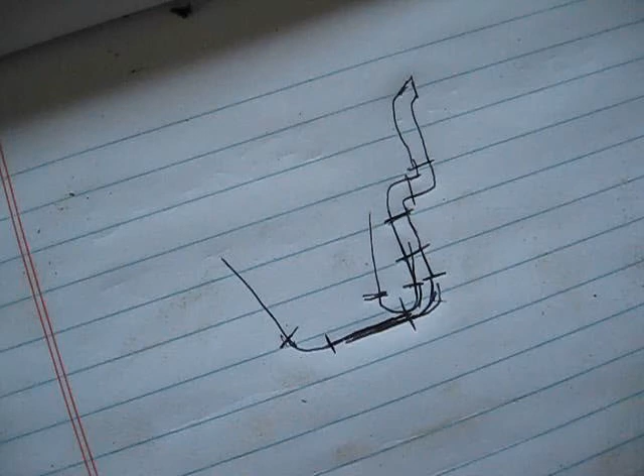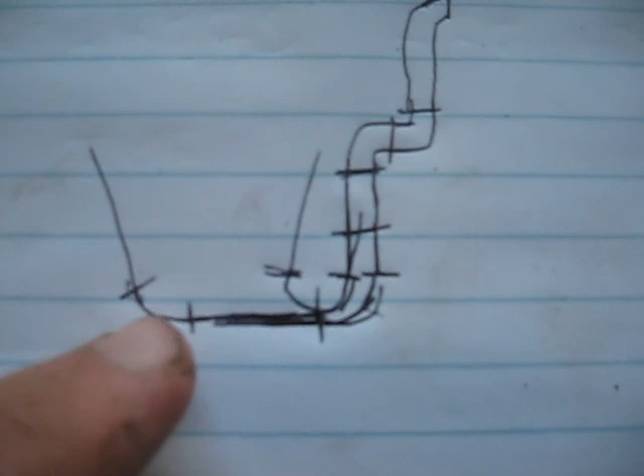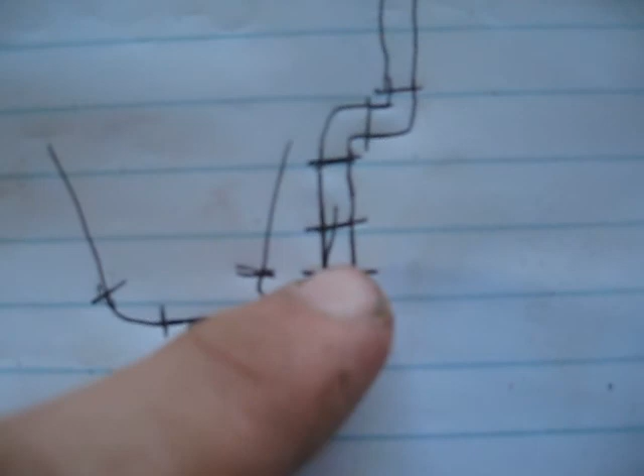Basically the plan for the exhaust is to have a bend come off the left side and a bend come off the right side. The right side bend will be a little sharper than a U because of how it's angled, so there'll be a bend coming from the left that matches it. Then a little ways after the bend, or right after it, it will be joined into a single pipe.

And that pipe will run over to the front of the running board, over, and then out my stainless steel side pipe.

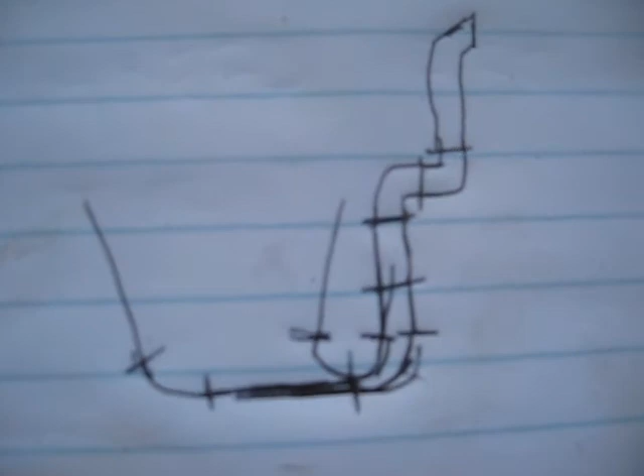So that is the basic plan for the Craftsman. Sorry it's a little blurry because I was in macro, but I have most of the pieces, I think, that are needed to do this.

I have the other piece of a futon frame that I can use for it, and that is what I am planning on using it for. So I have the sketch here, and now I just need to get cutting pipe.

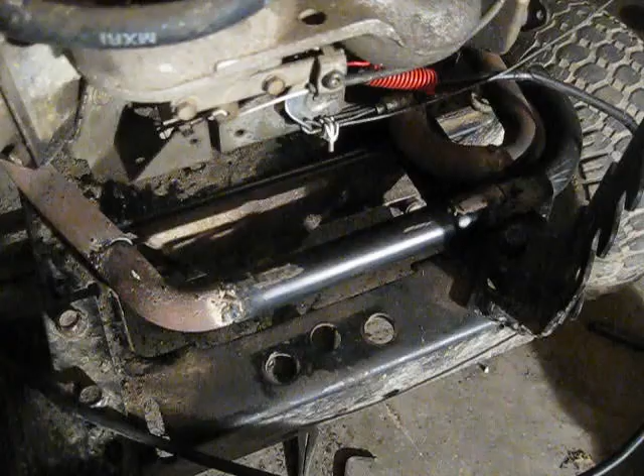So it's about 8:45 right now, and I have the manifolds pretty much done. I cut this one, and the other one obviously, and I have everything tacked in place, and it's looking pretty good—especially since I figured out how to get my welder to weld on a lower setting so that I can weld this stuff.

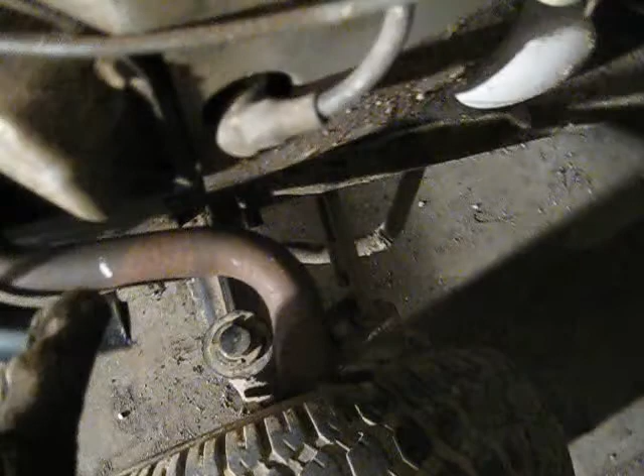It's coming together. So I have a mark to cut that so I can keep this manifold, but right after that spot I believe I'll be going to the bigger stuff like this. It'll come out and angle down, and I'll cut it out so that I have an elbow off that piece like that.

I'll have the elbow angled down, and then I'll have it come around, and I will have my side pipe mounted about halfway sticking out from this side piece, or maybe I might have it under all the way—I'm not sure yet. But I still have a long way to go.

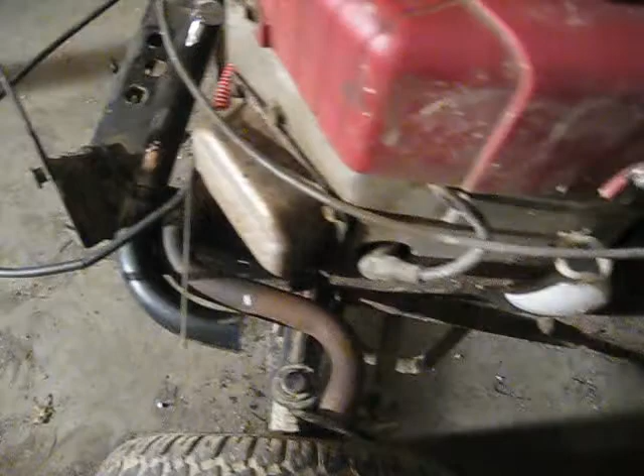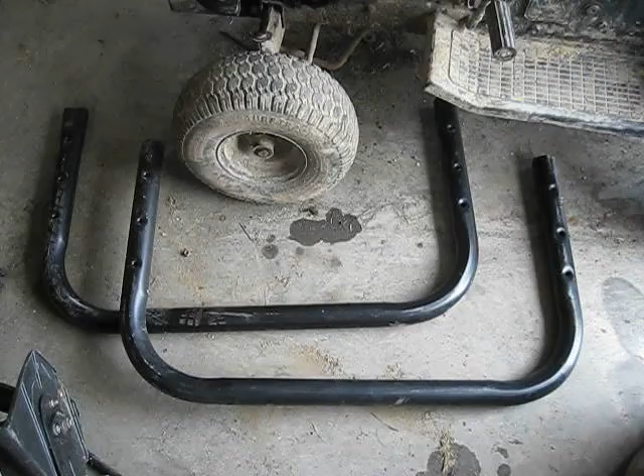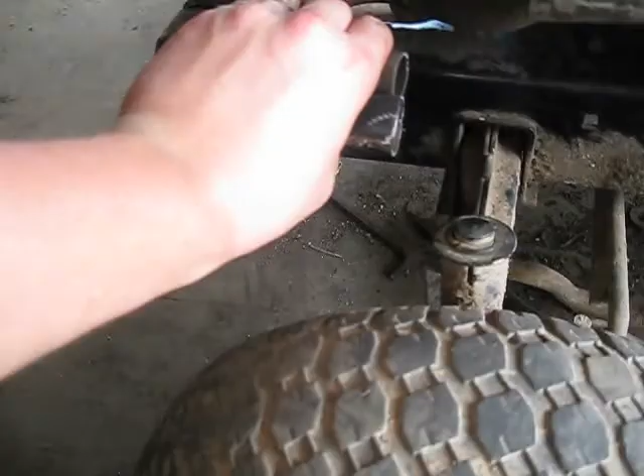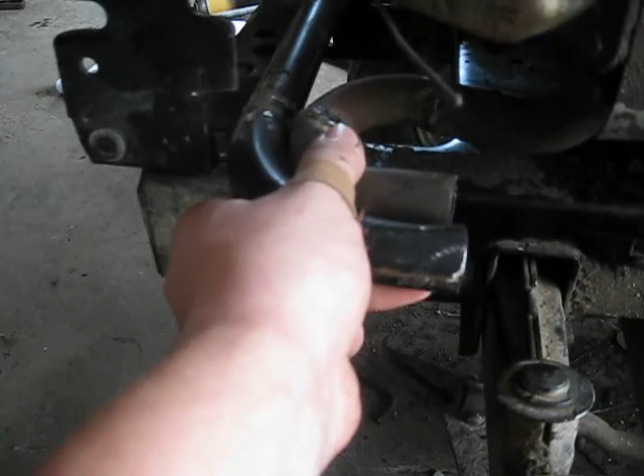Okay, so the game plan for today is to use these pieces of pipe here to finish up the exhaust. As you saw in my last clip, I got the exhaust on and it's all mounted up here. I have the hood bracket right here, and it's notched out so the pipe can get on there and it's tight, but it fits on there, so my hood should be good.

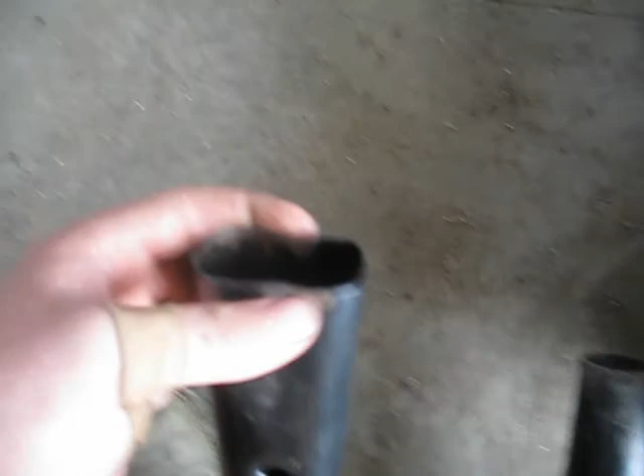To get this done, I have this idea to crimp the pipe kind of like this. This is just a test, but to crimp it—it's about the size of two pieces of pipe, about 1 by 1. So the pieces of pipe off of the angle right there should slide into something like that very easily.

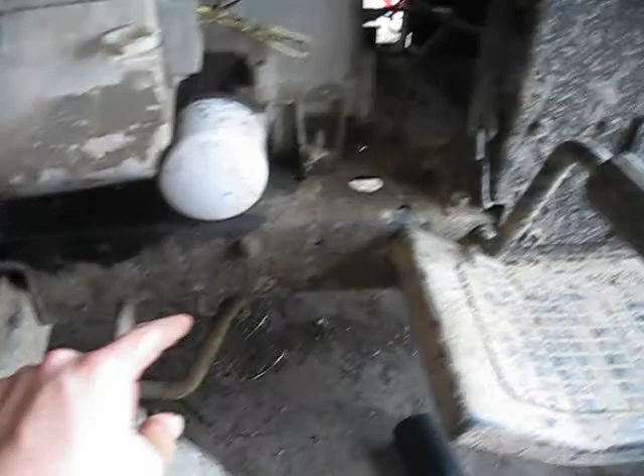Then what will happen is the pipe will angle down slightly to go underneath the running board here, and I might have it angled out so it comes this way, to have the pipe come out around right here. It'll be angle cut and should be good.

I'll probably secure it right to the back of the running board here, but there's a hole right where my finger's at—there it is. So, time to get started.

Well, I just barely got into mocking up the exhaust, and I already ran into a problem. As you can see, I have the tire cranked all the way, and if I hold the pipe up here in the orientation that I want it, which is right like that, that rubs the tire.

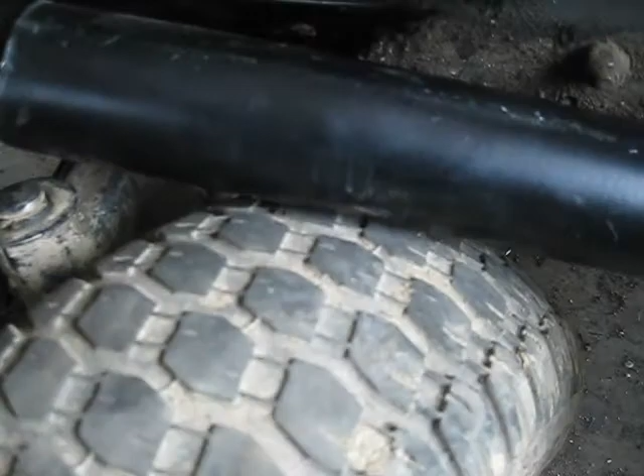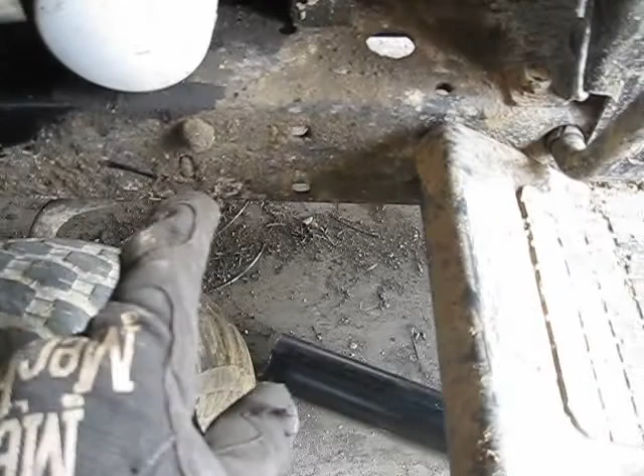So what's going to happen is I will have to have a straight pipe come off of this, and we'll have to angle it down somehow in this 4 inches or so that I have right here. So I'm going to start cutting pipe and see what I can come up with.

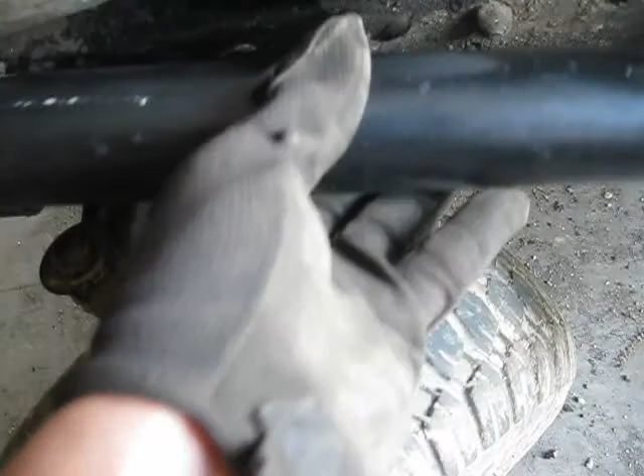Okay, so I have my piece of pipe right here, and it looks like if I have it angled like this, as you can kind of see the gap of how the angle is, it should be fine because I have just enough space between the pipe and the tire for my fingers. My one concern is melting this rubber piece here, but I think it should be fine.

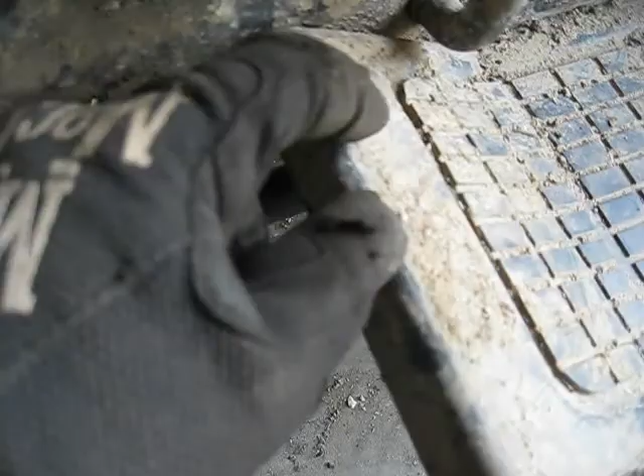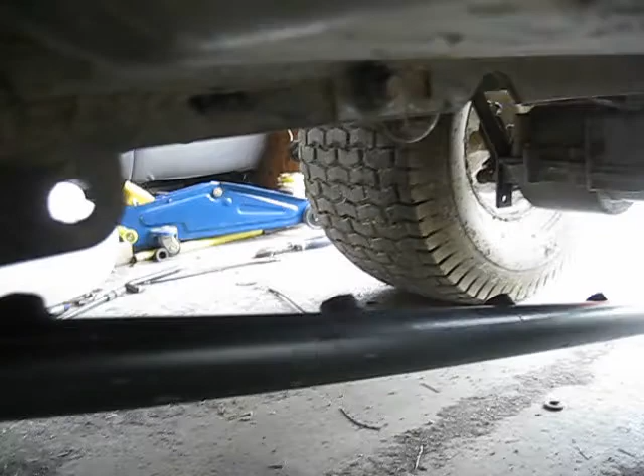So basically what'll happen is if I do use a pipe, get down lower here, it'll go on like so. It'll come out right there and then run straight across the bottom here, sorry about the bad camera angle, about right there or so, and angle out and come out back here.

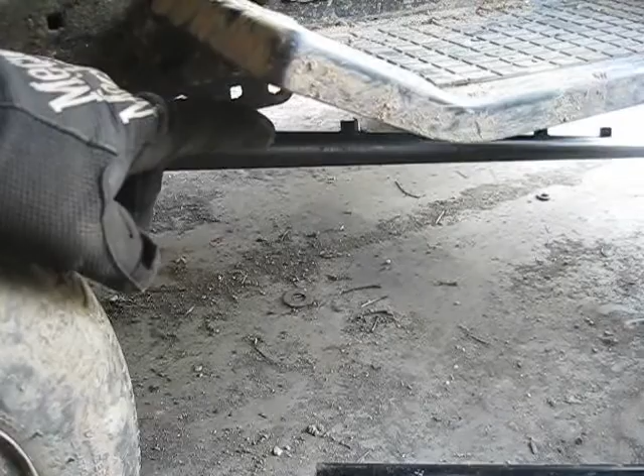You might have seen this other piece of pipe here, and what my other thinking was is to have it come off of this side right here and angle in sharp, and it completely misses the tire. I have about an inch of space, and if I do that, then I can have the other one run out a little bit taller than it and have it angle down and run parallel on top of this, kind of like how it runs right there, and have it run parallel down here. Maybe see about twisting it one more time and then having it go to a double pipe and come out as a single.

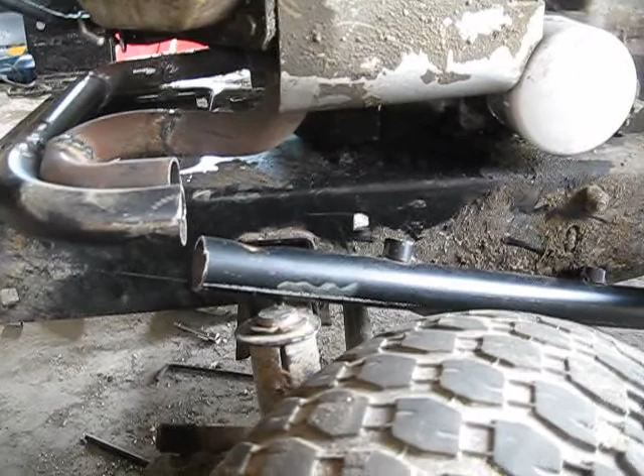So I'm not too sure about what I'm going to do yet. I'm going to sit here and contemplate it for a little bit, and then I'll start working on it, and once I come back you will see what I have decided.

So for the sake of getting this done, I think I'm done. I realize I have like 5 more hours in order to finish this the way that I want, but I'm running low on a cutting disc, and I really don't want to buy another one to cut the pipe, and there's a lot of angle work and stuff like that, and I don't really want to deal with it.

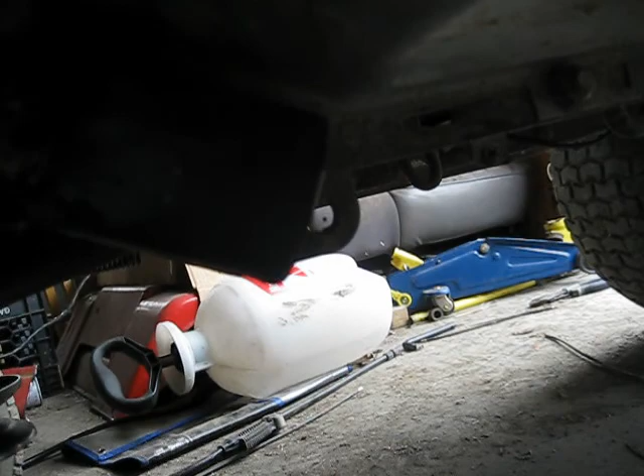So here's what I got so far. You can see I went with a singular pipe. I got the top welded there, and I got tacks welded, and basically what it does is it comes down here and it angles down, yeah, not much to it. I still have to weld everything back together, but I think it should be fine there. Maybe idling in one spot for a while might be a problem with melting this plastic piece here, but I don't think it's going to be that big of a deal.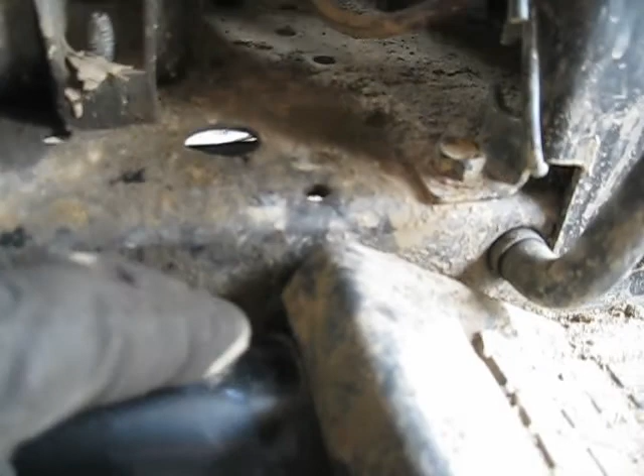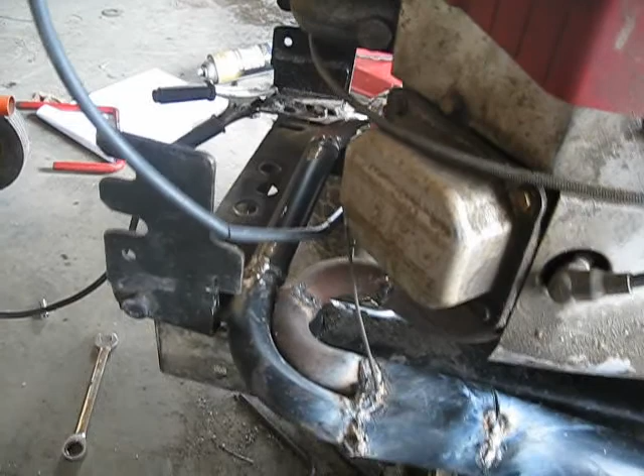I'm going to weld a washer onto the pipe right here so that I can drill a hole through here and have a support, because you don't want this banging around. So I'm going to take this all off again for like the 30th time in the past 2 days, and I'm going to finish welding it, and I will come back when I'm all done putting it together.

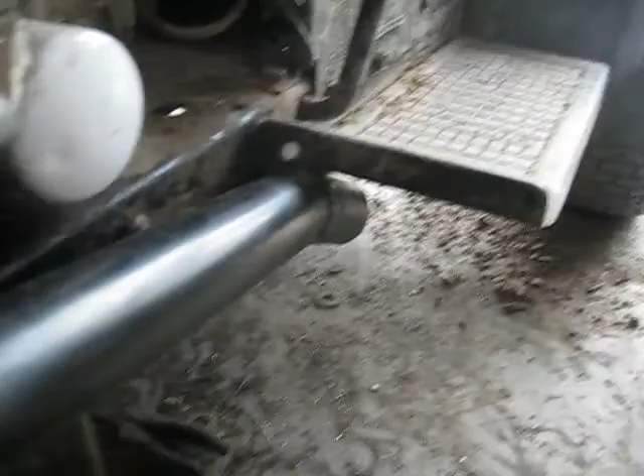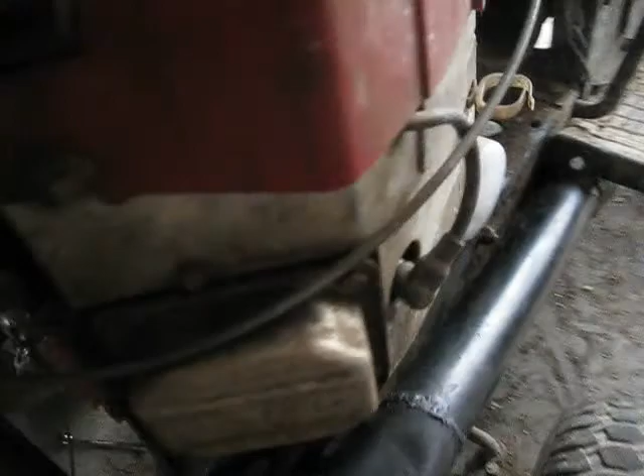Okay, so the exhaust is all done. I'm a little frustrated because this manifold right here, this is the head that's lower, and it's really hard to get those bolts, and I actually went with a hex head instead of an Allen head. But yeah, it's all secured, nice and tight, shouldn't have any problems with it falling off. It just exits out right here at the bottom because I'm too lazy to do a side pipe, but it should be fine. I'm gonna slap the hood on here and we'll give it a go.